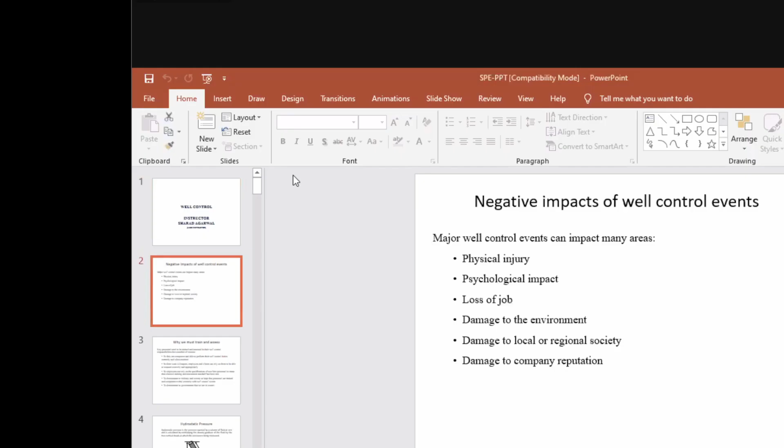Okay, so why well control? I hope you guys can see my screen. Okay, so why is well control important?

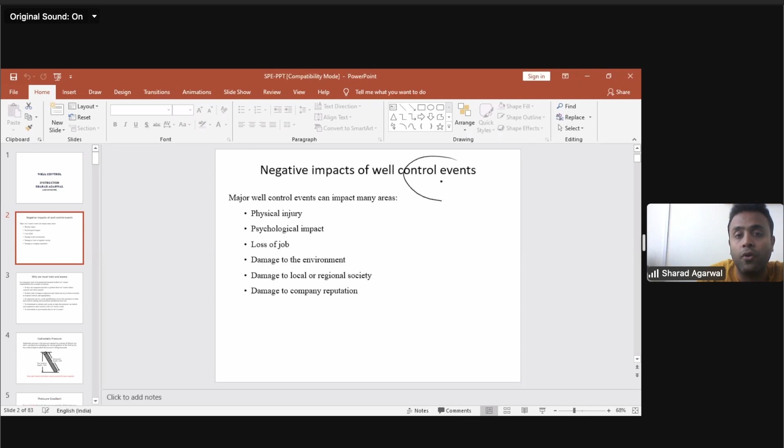Well control is very important. If there is any well control event on rig, what are the negative impacts? When I say well control event, I consider here a blowout or kick.

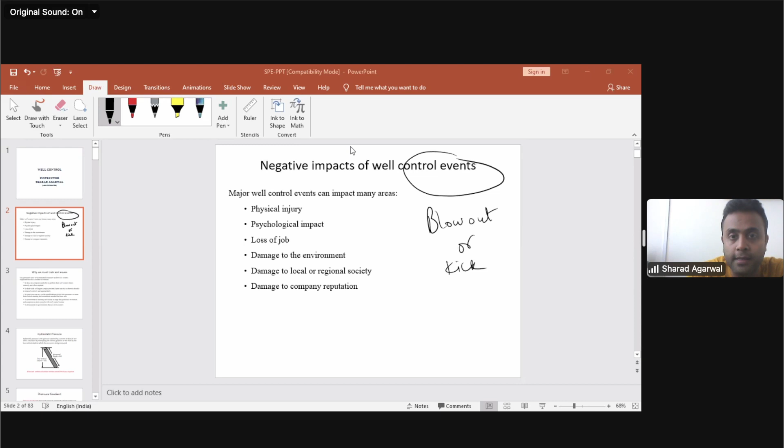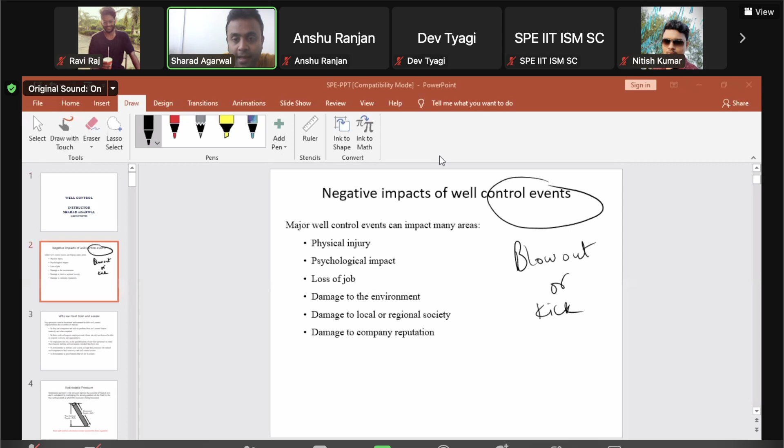So when I say blowout or kick, what do you mean by blowout or kick? What is the difference between blowout and kick, guys? Message me in the chat box. Yes, Supriya, very active candidate in my class. Dev, very good. So what is the difference between blowout and kick?

Kick is controllable. Blowout is uncontrolled. No. Very good, Rishabh Kumar. So is it kick? Rishabh has given me the right answer.

So kick is entry of formation fluid in the wellbore. When formation fluid is in the well, it is called kick. And when this formation fluid comes to the surface, it is called a blowout. You can control kick as well as blowout, there is no problem in that. Kick is an entry of formation fluid in the wellbore, and blowout is at the surface.

Very good, Rishabh. So if there is any well control event, it will impact many areas, like physical injury, psychological impact, loss of job for driller, tool pusher, rig managers, assistant drillers, they can lose their job, and damage to the environment. Which incident was that? Yeah, Gulf of Mexico. You know guys, in Gulf of Mexico, sea animals died. The environment was badly affected.

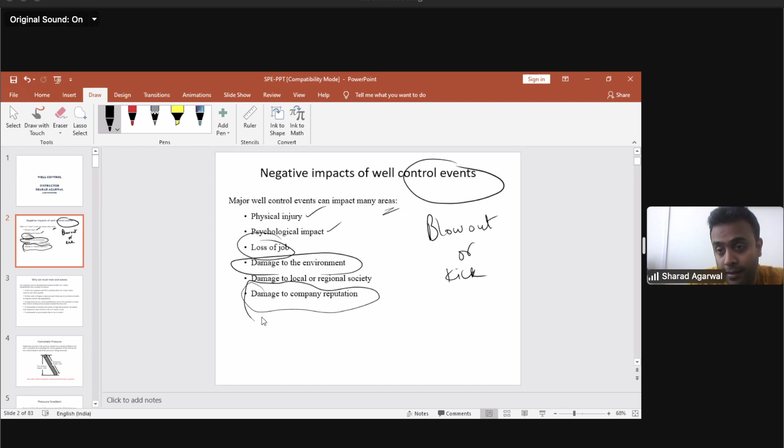So why must we train and assess? Why is well control training important? Key personnel, meaning anybody working on a rig or in the oil and gas industry, must do well control training. Key personnel need to be trained and assessed in their well control responsibility for a number of reasons. Now you guys are doing this course.

Of course it's a short course, but doing this course means you are aware of what to do in case of a kick and what to do in case of a blowout, and apart from that, you also know how to detect a kick. It is very important.

So this well control training is not only for freshers. Everybody working in the oil and gas industry should do this course every 2 years so they can review their well control knowledge. In well control training, we teach so that people are competent and able to perform their well control duties correctly and when required.

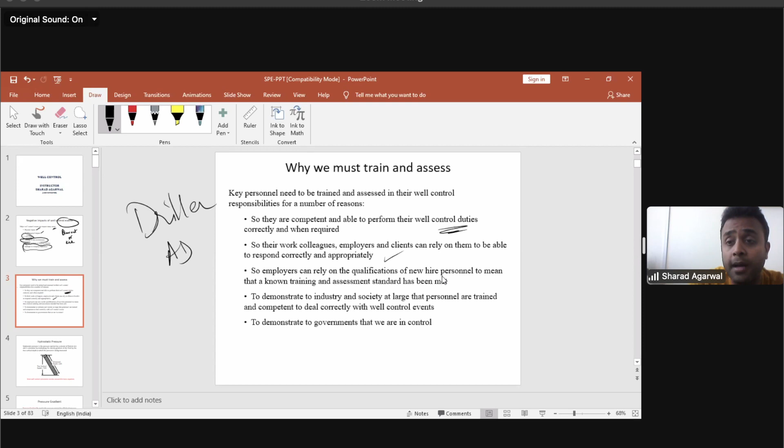Okay, so it is very important that driller, assistant driller, tool pusher, rig managers, they know how to detect a kick, what are the kick indicators, what are the kick warning signs. So their work colleagues, employers, and clients can rely on them to respond correctly and appropriately. Anybody who has this well control certificate, whether from IADC or IWCF, it proves that you have knowledge of well control and your colleagues, employers, clients rely on you. Mr. Dev, Mr. Anshu, Mr. Ravi, Mr. Rishabh, they have done this basic training, they have the basic knowledge of well control, and we can rely on them because they hold valid IADC or IWCF certificate.

So employers can rely on the qualification of new hire personnel to mean that a known training and assessment standard has been met. IADC and IWCF are two international organizational bodies. They approve some institutes where you can go and do this well control training. It's usually for 5 days. You complete this well control training, complete exams as per IADC and IWCF standards, and if you pass, you get your certificate.

This is to demonstrate to industry and society at large that personnel are trained and competent, and to government that we are in control. Indian government or Middle East government authorities have some restrictions on drilling companies, that if you are drilling in this location, all your employees should have IADC or IWCF certificate.

Okay, let us start with well control. So what is hydrostatic pressure? I told you we use mud to control. What are the functions of mud? Yes, to exert some hydrostatic pressure, to lift cuttings, mud cake, lubricant. There are different functions of mud, but in well control, mud is exerting some pressure at the bottom of the well. So this pressure, when the mud is static, is called hydrostatic pressure.

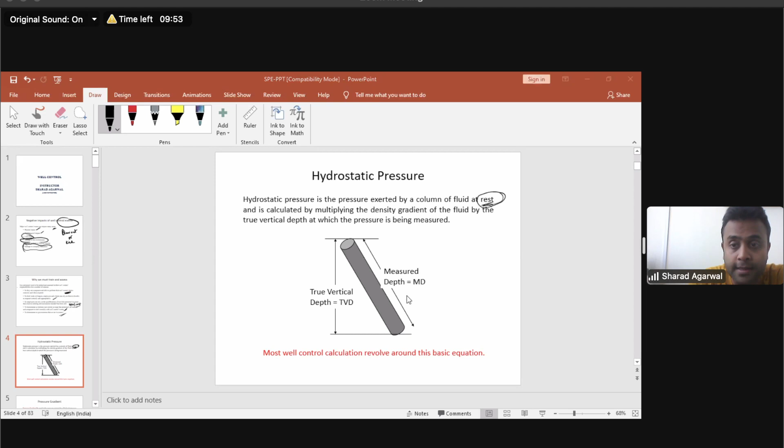And this pressure is calculated using the formula: hydrostatic pressure equals mud weight into constant 0.052 into true vertical depth. Hydrostatic pressure is the pressure exerted by a column of fluid at rest and is calculated by multiplying the density gradient of fluid by the true vertical depth at which the pressure is being measured. So this is the formula: hydrostatic pressure is mud weight into 0.052, which is constant, and TVD is true vertical depth, in feet.

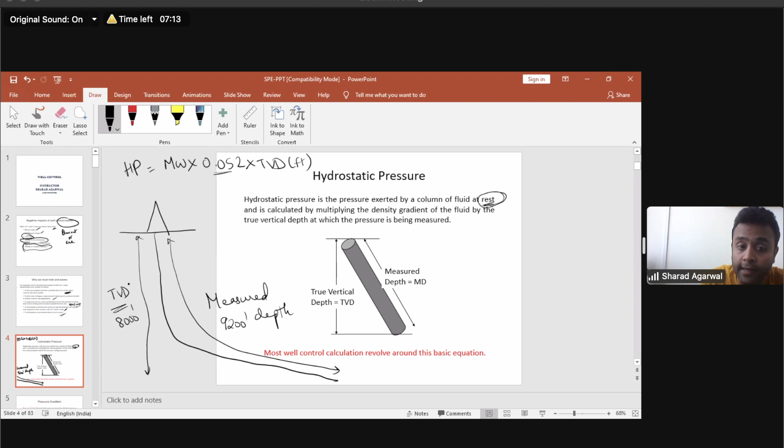So please keep it in mind that while calculating pressure, whether it is hydrostatic pressure, bottom hole pressure, any pressure, you have to consider TVD. In exams, sometimes they confuse you, asking you to calculate hydrostatic pressure and then giving you both TVD and MD. So don't get confused. If they're asking you to calculate pressure, consider TVD. And if they are asking you to calculate strokes required for circulation, time required for circulation, or well volume, then you have to consider measured depth - the total length of the well.

Okay, so MW is mud weight. Mud weight is in PPG. What is PPG? Yes, message me in chat box. What is PPG? Where is my Rishabh? Rishabh Kumar, what is PPG? Come on... Pounds - whoa, whoa, whoa, very nice, very nice. Okay, yes correct, PPG is pounds per gallon. Very good. Okay, come on, now do this calculation.

If mud weight, let me see. Let me stop this.

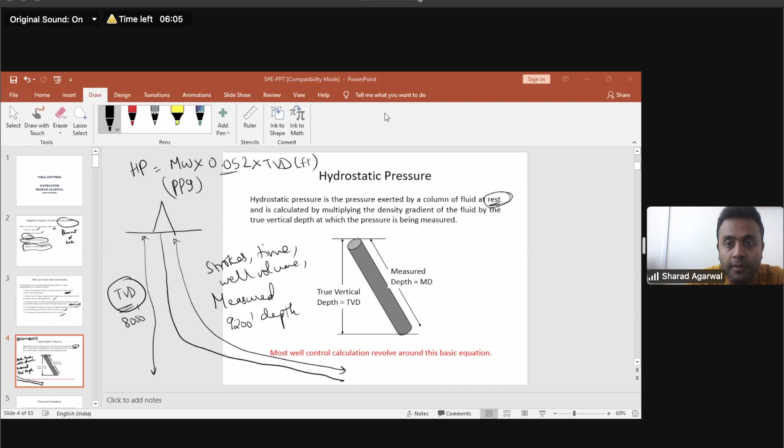Okay, so we have seen the formula for hydrostatic pressure is mud weight into 0.052 into TVD. Now suppose mud weight is 10 ppg and TVD is 10,000 feet.

So what is hydrostatic pressure? Message me in the chat box. Yes, very good, it's 5,200 psi. Very good, guys.

So units is very, very important. Please use units everywhere. If you are working on rig, units is very, very important, guys.

So now keeping constant mud weight as 10 ppg, if I change my TVD to 1,000 feet, then what is my hydrostatic pressure? Guys, TVD is 1,000 feet, it is not 1 lakh feet.

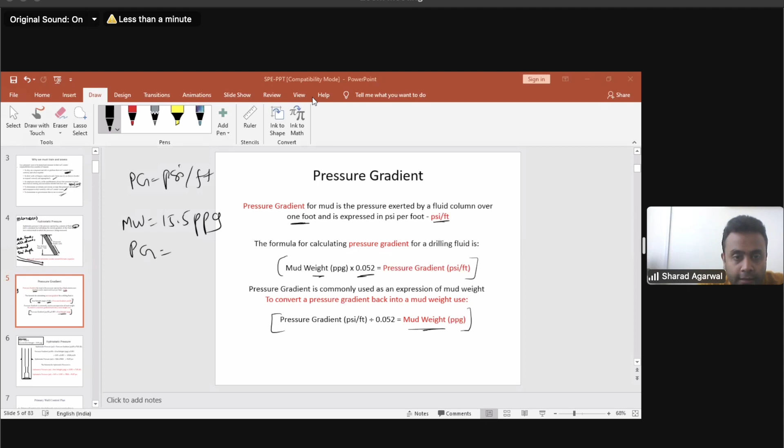Calculate pressure gradient. Yes Nitesh, very good. It is 0.806 psi per feet. Very good, guys, I'm really happy that you guys are learning.

So this means that 15.5 ppg mud exerts 0.806 psi pressure per feet. Now, if my pressure gradient, come on, listen to me, if my pressure gradient...

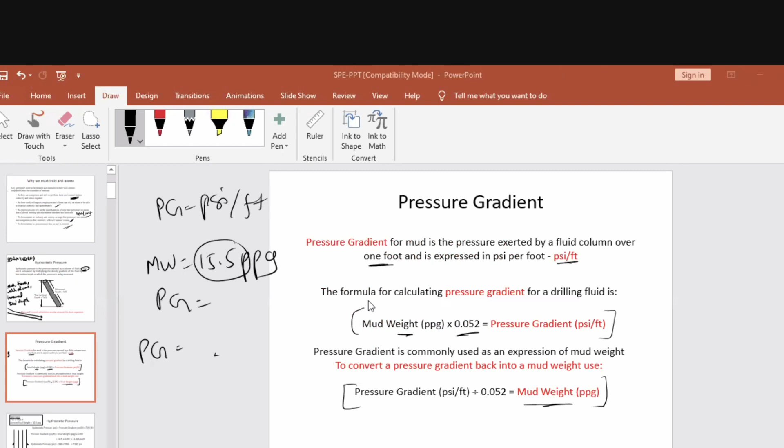Okay guys, so we were learning about pressure gradient. Come on, so if pressure gradient is 0.44 psi per feet, then calculate mud weight. Come on, tell me your answer, guys. If pressure gradient is 0.44 psi per feet,

yes, so what is your mud weight? We have already discussed. Yes, very good Anshu, so it is 8.46 ppg. Excellent, excellent work, guys, very good. I'm so happy you guys are learning.

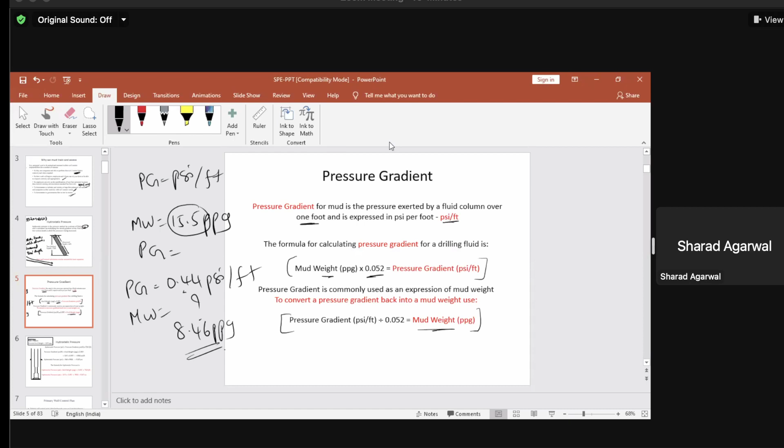Okay, so understood? So now we will... Yeah.

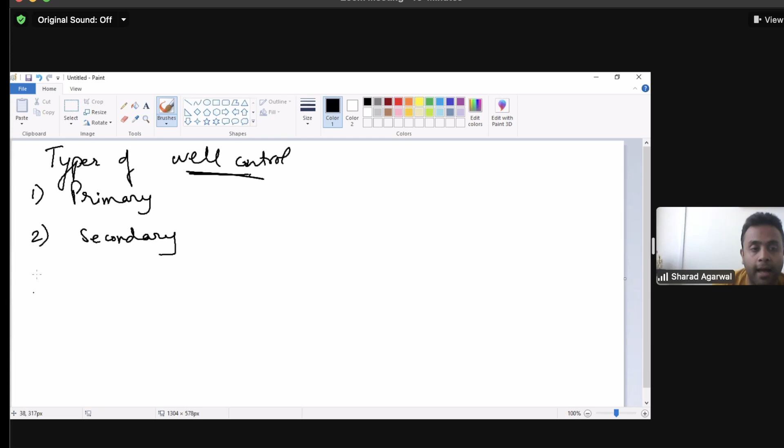Okay, so now we will learn types of well control. Types of well control means what are the different types of well control? How do you control a well? So number one is primary well control, two is secondary well control, and three is tertiary well control. Okay, so it's primary, secondary, and tertiary.

So what is primary well control? Can anyone tell me? How do you control your formation fluid from entering the wellbore? Primary well control, how? By mud, yes, very good Nitesh.

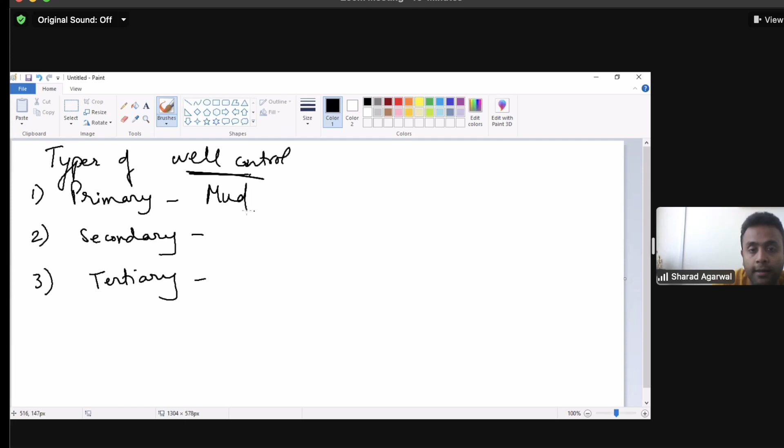By maintaining hydrostatic pressure. So mud, you're using mud to exert hydrostatic pressure at the bottom. So mud is your primary well control.

Now, if your primary well control fails, then what is secondary well control? Very good, Nitesh. If your primary well control fails, formation fluid enters the wellbore. How will you control your well then? Formation fluid.

Yes, very good, Nitesh, Sandeep, Divesh. So you are using your BOP. Okay, BOP is your secondary well control.

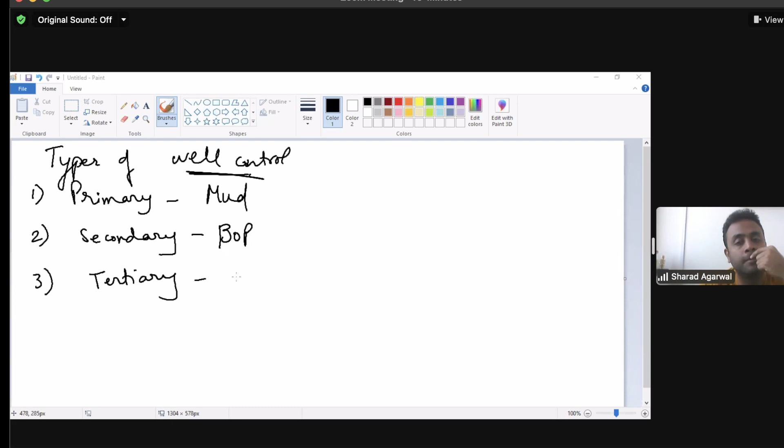Shear rams. Tertiary well control is use of shear rams. You see, these are shear rams. Now what they do - if your annular BOP fails to close, then you use shear rams. Shear rams will cut the pipe and close the well.

Okay, so this is what happened in Gulf of Mexico. Primary barrier failed, mud failed, formation fluid entered the wellbore. Secondary barrier, annular BOP, failed. Tertiary rams, shear rams, also failed, and there was a blowout. So let us watch that video, guys.

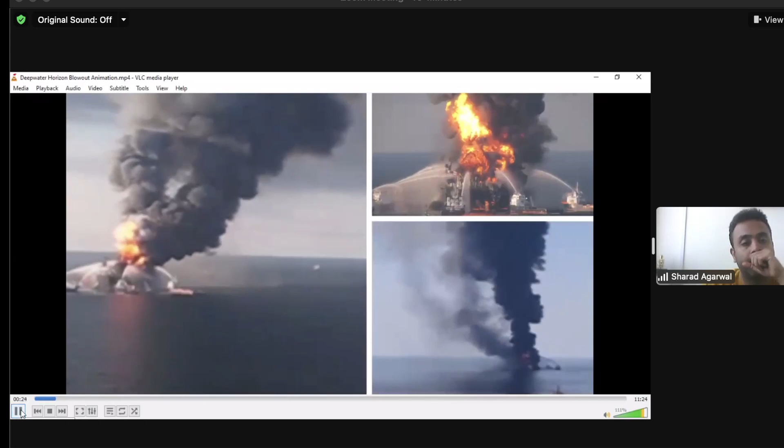April 20th, 2010. 11 workers died and 17 were seriously injured by an explosion on the Deepwater Horizon, an offshore drilling rig located approximately 50 miles off the coast of Louisiana. The rig burned for 2 days, eventually sinking and triggering the largest oil spill in U.S. history.

Okay, guys, 11 people died and many more were injured. And see the sea animals, see the condition of the sea animals, see the condition of the sea. Okay, very, very, very disappointing, guys.

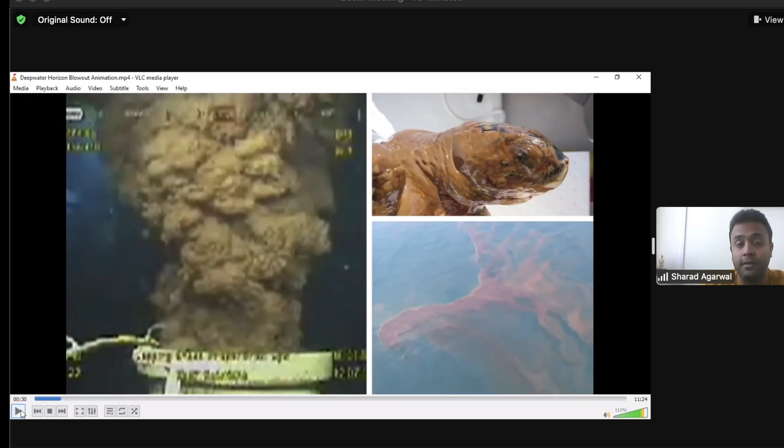Oil and gas spewed up from the sea floor. The Deepwater Horizon had been drilling oil wells.

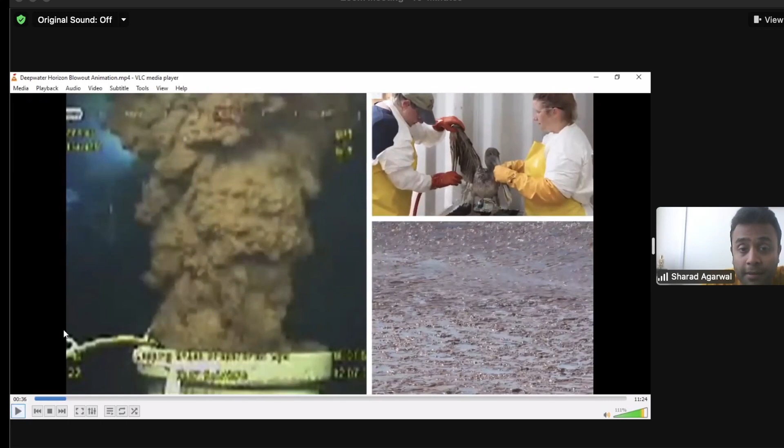See, guys, birds, animals, sea animals, in 5,000 feet of water. See the conditions, see the water, all oil everywhere, mud, oil-based mud everywhere.

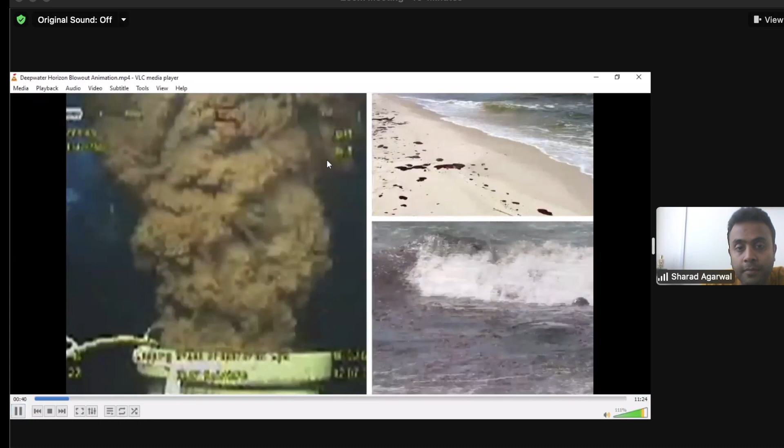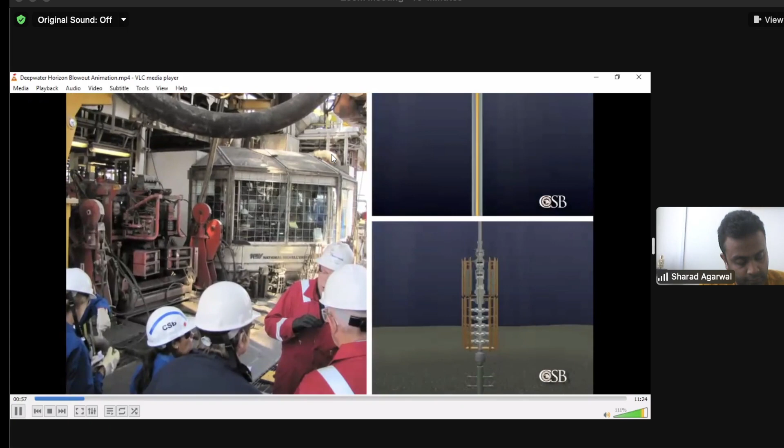In an area of the Gulf of Mexico known as the Macondo Prospect. In 2010, the CSB launched an investigation to examine the technical, organizational, and regulatory factors that contributed to the accident. During the investigation, the CSB made new findings about why a key piece of safety equipment, the Deepwater Horizon's blowout preventer, failed to seal the well during the emergency. These new findings help explain why the accident was so devastating. And the CSB cautioned that other blowout preventers currently in use could fail in similar ways.

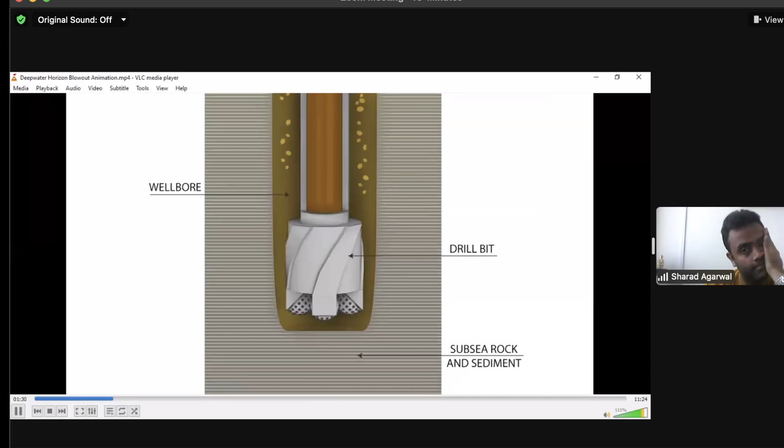Drilling an offshore well involves creating a pathway between the drilling rig and oil and gas reservoirs trapped beneath the sea floor. A deep hole, or wellbore, is drilled through layers of subsea rock.

So guys, you have to keep in mind that formation fluid will enter only the annulus. Formation fluid will never enter the drill string because we have a float valve, that is a non-return valve, a one-way valve near the bit. If we don't have a non-return valve near the bit, then there is a possibility that formation fluid will enter the drill pipe, the drill string. But most of the time formation fluid will enter only the annulus.

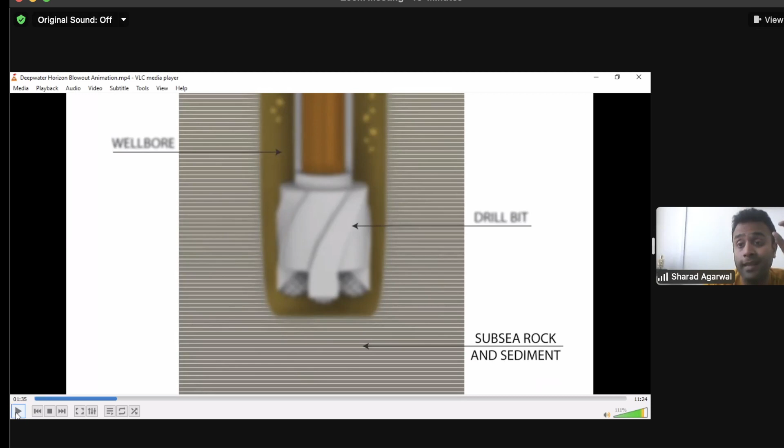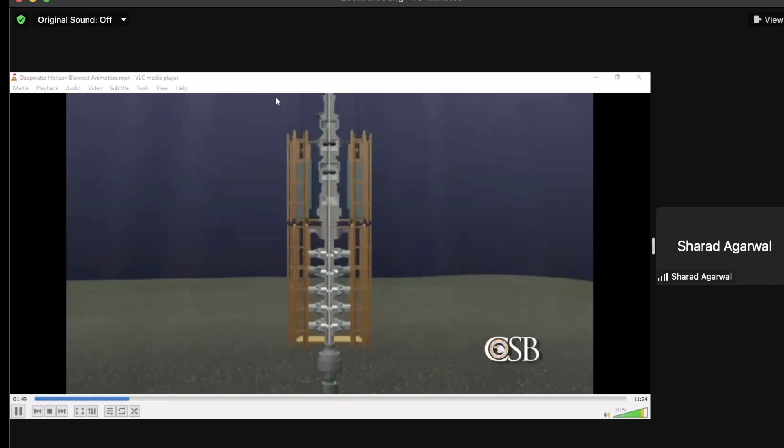Sediment. These rocky layers can contain trapped water, crude oil, and natural gas under pressure. An unplanned flow of these well fluids into the wellbore, known in the industry as a kick, can be dangerous. Without careful management, a kick can lead to a blowout, the uncontrolled release of flammable oil and gas from the well.

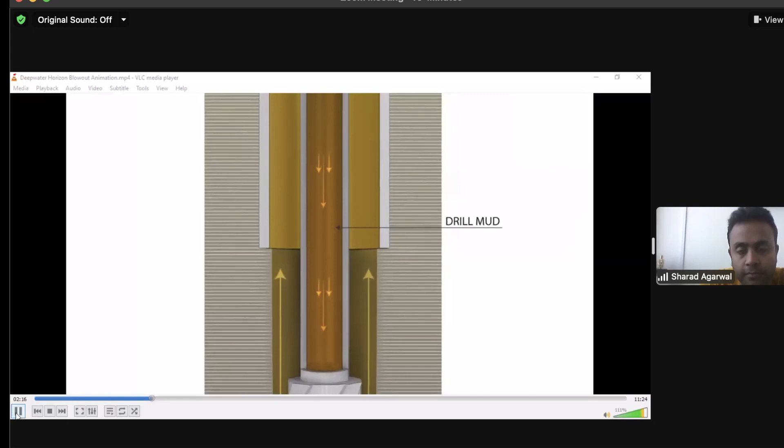A blowout can be catastrophic, since oil and gas reaching the drilling rig can quickly find an ignition source, leading to a fire or explosion, endangering the lives of the drilling crew. To prevent kicks, drillers pump a dense slurry called drilling mud into the well, creating a barrier between the undersea oil and gas and the piping that leads to the rig.

If the mud barrier fails or is somehow removed, the safety of the drilling crew depends on a critical piece of equipment located on the sea floor called the blowout preventer, or BOP. The BOP is a complex electrically and hydraulically powered device that is essential for controlling the well.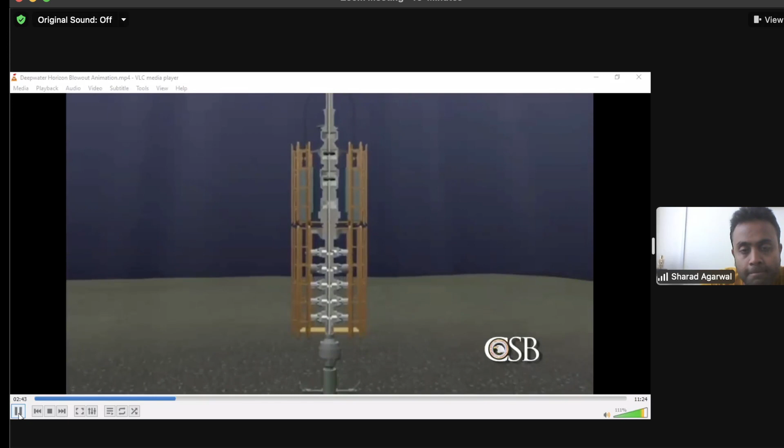So guys, these are rams. This is our drill string, drill pipe. As I said, we have different types of rams: one is annular BOP, pipe ram, blind ram, and shear ram.

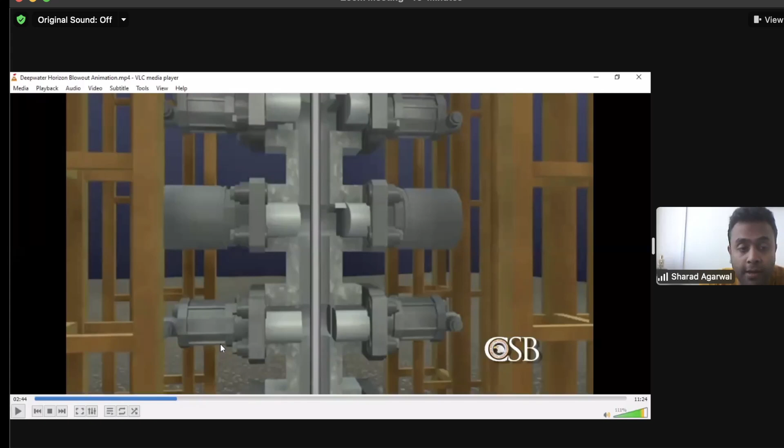In an emergency situation, the BOP prevents a disaster on the platform high above on the sea surface. The BOP is connected to the rig by a large diameter pipe called a riser. If a kick occurs, the blowout preventer is designed to prevent flammable oil and gas from traveling up the riser to the drilling rig. This is done by sealing the area around the drill pipe, known as the annular space.

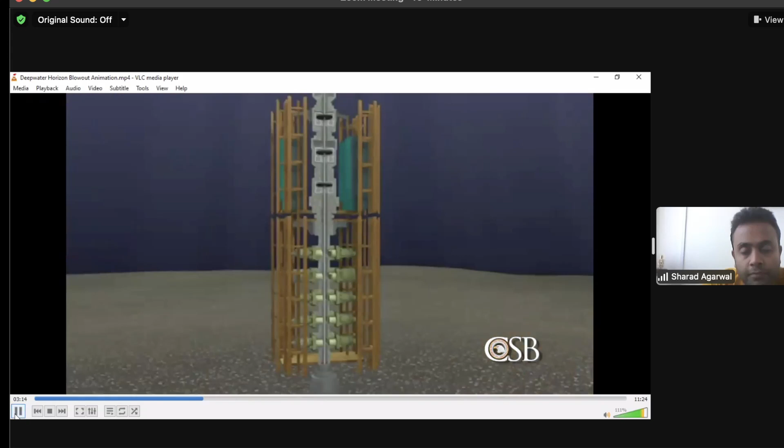To do this, the crew can manually close pipe rams, donut shaped. So guys, this is how we close rams. It will close around the pipe and stop the flow of fluid to surface through the annulus. These are rubber devices known as annular preventers.

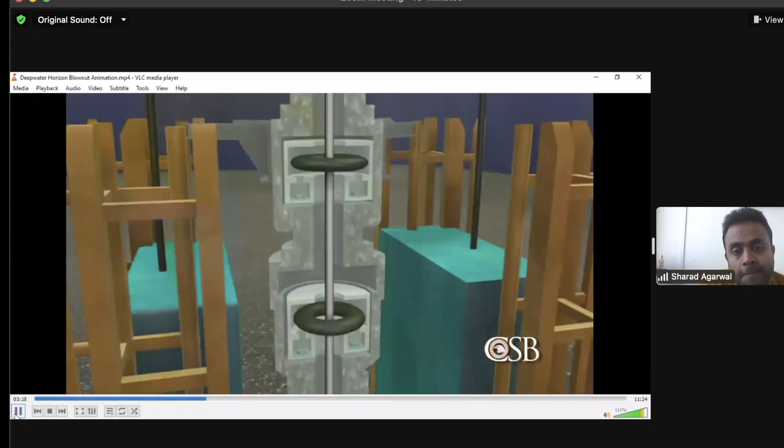If those devices fail to work, the last resort is a pair of sharp metal blades which form a blind shear ram. So this is shear ram, guys. The shear ram will cut the pipe and seal the hole, cutting the drill pipe and sealing the well.

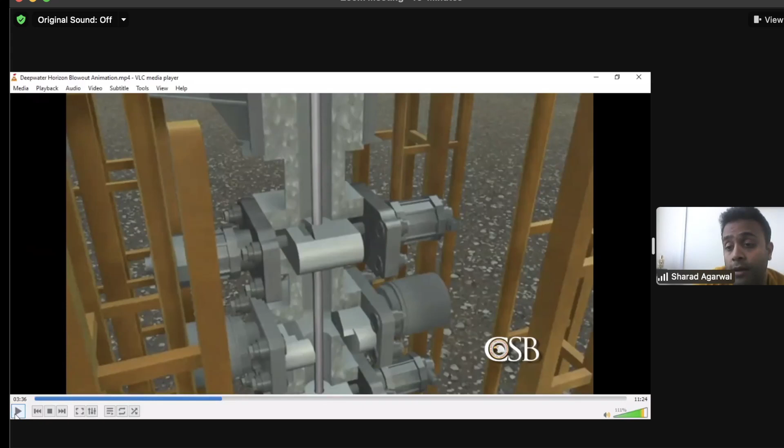The blind shear ram can be activated manually or by automated emergency systems. So this is the tertiary well control, the last part of well control, used only in case of emergency, where we cut the pipe and seal the hole.

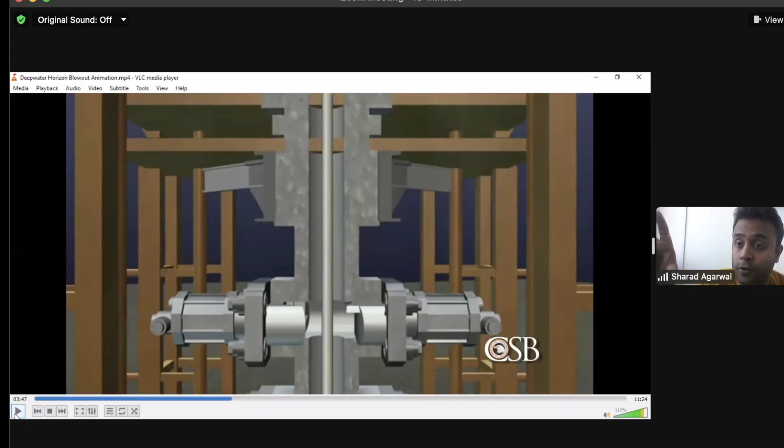The driller detected the kick, but it was too late. He tried to close the annular BOP, but it failed. Then he tried to close the shear ram, but even the shear ram failed. Now why? Let us see.

The kick went undetected, eventually passing above the blowout preventer and traveling quickly up the riser toward the Deepwater Horizon and the 126 people on board.

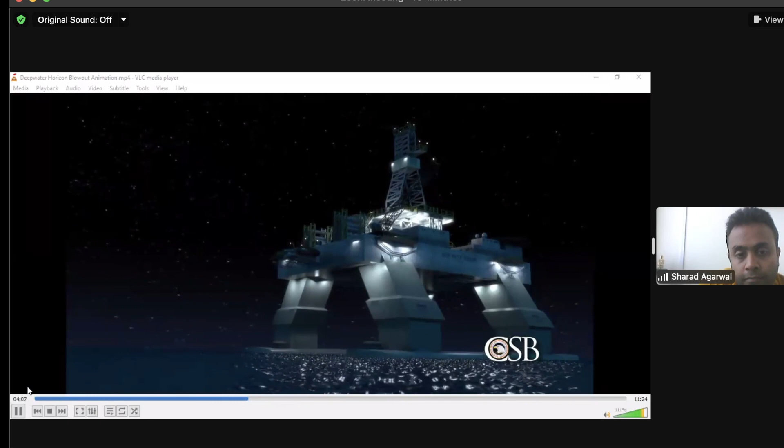Just after 9:40 p.m., drilling mud, forced upwards by the rising oil and gas, suddenly blew out onto the rig. Crew members responded by closing the upper annular preventer in the BOP. However, this did not seal the well as intended, and flammable oil and gas continued to flow.

The annular BOP failed to control the flow of formation fluid to the surface, and it continued up the riser toward the rig.

Next, the crew closed a pipe ram. This successfully closed the annular space and sealed the well. But tragically, this proved to be only a temporary fix, as oil and gas that were already above the pipe ram continued to flow inexorably toward the Deepwater Horizon.

As the oil and gas escaped the riser onto the rig, the pressure dropped in the annular space above the pipe ram. But at the same time, the pressure in the drill pipe climbed substantially. The drill pipe was closed at the top, but oil and gas continued to flow in from the reservoir below.

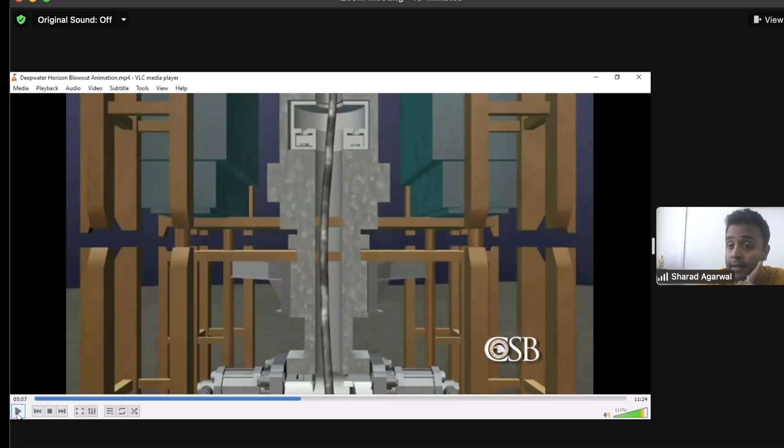After extensive analysis, the CSB concluded that this large pressure difference likely caused the drill pipe to buckle. This is the important reason, guys: because of the large differential pressure in the pipe and in the annulus, this pipe buckled, and when the driller closed the shear ram, it was not possible to shear, because of the buckling of the drill pipe.

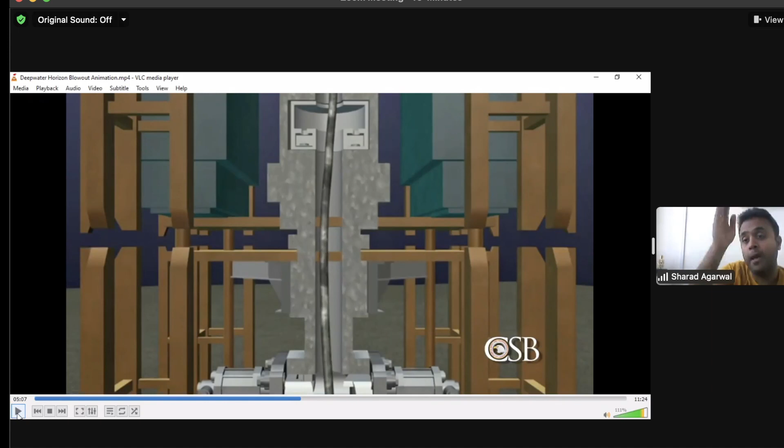It was not able to shear the pipe and close the well. Let us see in this video — it was actually bending the pipe off center inside the blowout preventer. The buckling pushed sections of the drill pipe outside of the reach of the blind shear ram blades. This would eventually prove to be catastrophic.

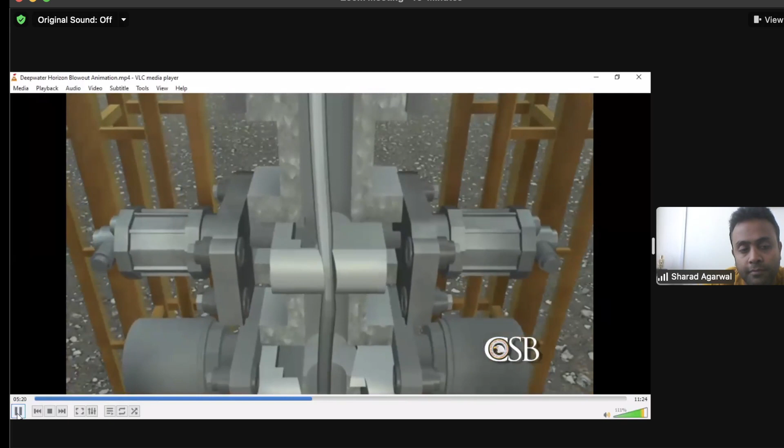At approximately 9:49 p.m., the flammable hydrocarbons found an ignition source. The first explosions shook the Deepwater Horizon.

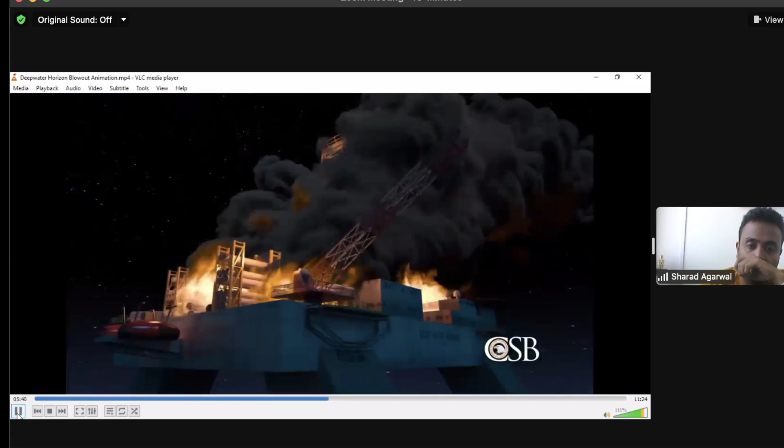With the drill pipe buckled, the explosion and subsequent loss of electrical and hydraulic power from the rig likely activated an automated system on the blowout preventer known as the AMF deadman, which closes the blind shear ram. So guys, you understood this, the reason behind

Gulf of Mexico incident. Okay, so guys, this is very important. Well control is very important, you should detect kick at the right time, and you should always properly maintain your equipment. It is always recommended that this pressure testing equipment should be pressure tested and function tested every 14 days, as per API recommendation. Sometimes there is time pressure from the operator company side, so usually they do it in 30 days.

So let us continue. Any questions, anyone?

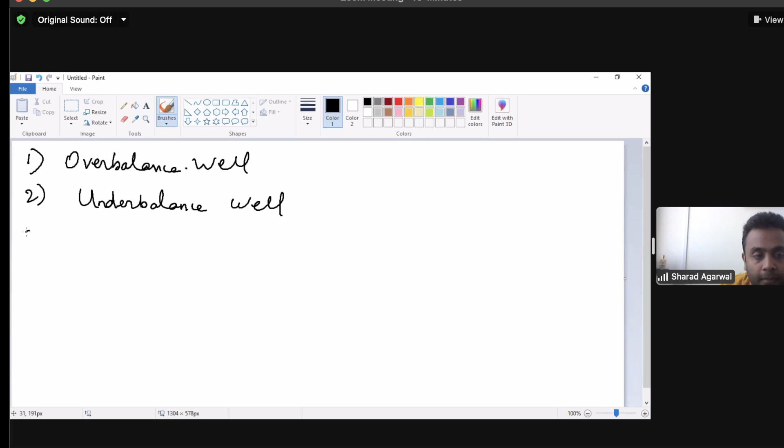So now we'll see different types of balances. Number one, overbalanced well. Number two, underbalanced well. Number three, balanced well.

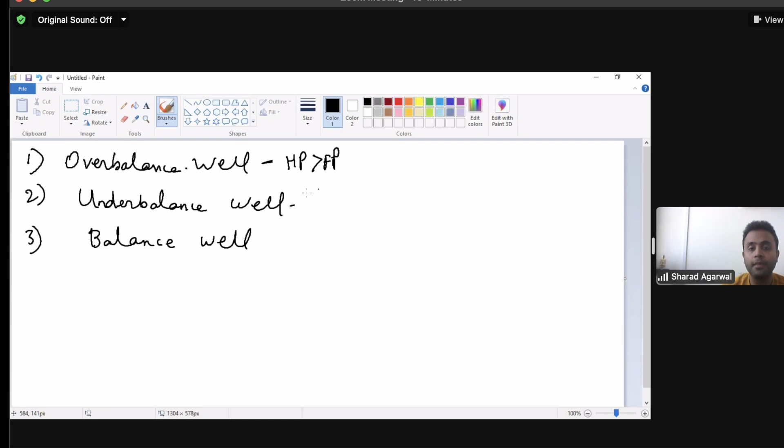So what is overbalanced well? Overbalanced well is when your hydrostatic pressure is greater than formation pressure. So when hydrostatic pressure is greater than formation pressure, the well is said to be overbalanced. Underbalance is when hydrostatic pressure is less than formation pressure, then the well is said to be underbalanced. And balanced is when hydrostatic pressure is equal to formation pressure, then the well is said to be balanced.

It is always recommended that you keep your well overbalanced, that is hydrostatic pressure slightly greater than formation pressure, so that you can drill properly.

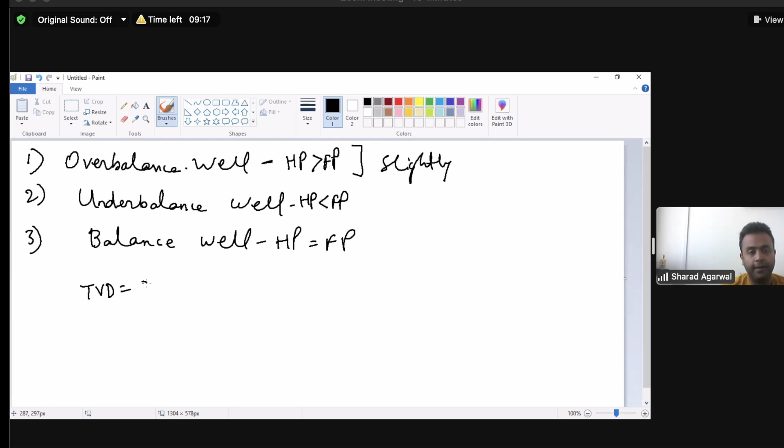Okay, let us do one numerical. Now suppose your TVD is 9,500 feet, mud weight is 9.5 ppg, and formation pressure gradient is 0.52 psi per feet. Tell me whether the well is overbalanced, underbalanced, or balanced. Calculate hydrostatic pressure, calculate formation pressure, and check. They've given you TVD, mud weight, and formation pressure gradient. Tell me whether the well is overbalanced, underbalanced, or balanced.

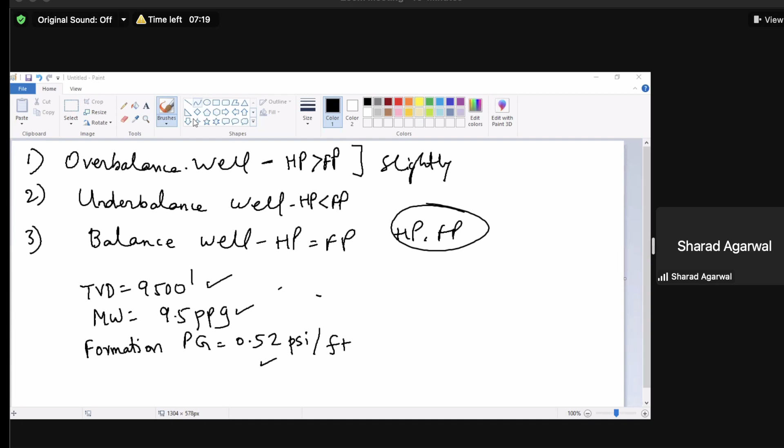Yes, very good, so the well is underbalanced. How will you do it? First, you calculate your hydrostatic pressure: mud weight 9.5 into 0.052 into 9,500, so it is 4693 psi, that is your hydrostatic pressure. Formation pressure is 0.52 into 9,500, which is 4940 psi. So your formation pressure is more than hydrostatic pressure, so the well is underbalanced. Okay, very good.

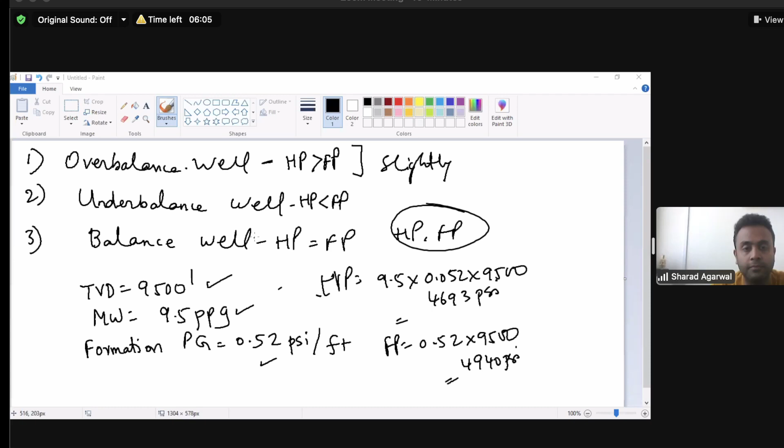So now we'll learn about types of pressures. Number one is abnormal formation pressure. We have normal formation pressure, and we have subnormal formation pressure. Abnormal formation pressure is if the formation pressure gradient is more than 0.465 psi per feet, it is said to be abnormal formation pressure zone.

Most of the kick will occur in abnormal formation pressure zone. Normal formation pressure is if the pressure gradient is more than 0.433 psi per feet, but less than 0.465 psi per feet, then it is said to be normal formation pressure zone.

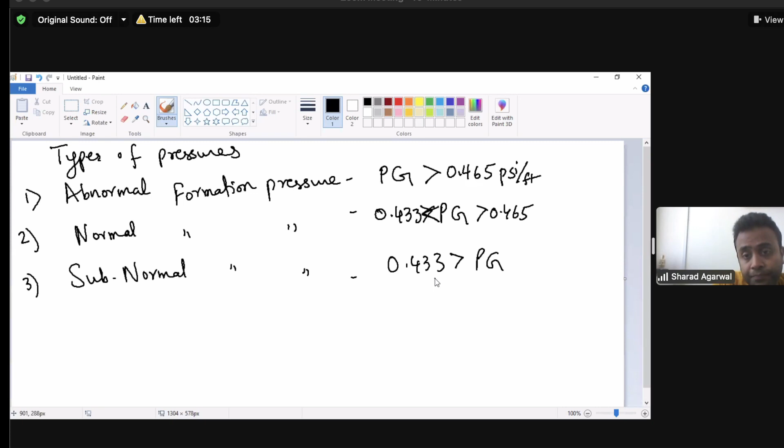So what is 0.465 psi per feet? It is the pressure gradient of seawater. So if formation pressure gradient is more than 0.465 psi per feet, it is abnormal formation pressure zone. If the pressure gradient is between 0.433 and 0.465, it is normal pressure zone. Subnormal pressure zone is if it is less than 0.433.

So what happens in subnormal? Mostly loss circulation will occur in subnormal pressure zone.

Any questions, anyone? I think it will finish in 2 minutes, huh? Yes, sir, so you wanted me to conduct for 1.5 hours, no? You want me to continue or stop? So you can continue with your presentation. Okay, we'll continue for 15 minutes more then. I don't know what plans you guys have.

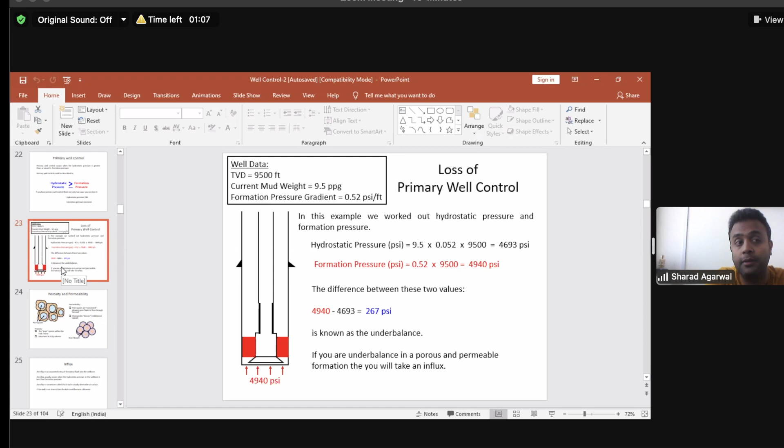Okay, so we have discussed very important topics. We have discussed hydrostatic pressure, formation pressure, pressure gradient, and we have also seen the Gulf of Mexico incident, why the team failed to close the BOP, why the BOP failed. Because of buckling of drill pipe, it got off-centered and we were not able to close the well. And now we have seen types of balances - overbalanced, underbalanced, balanced - and types of pressures.

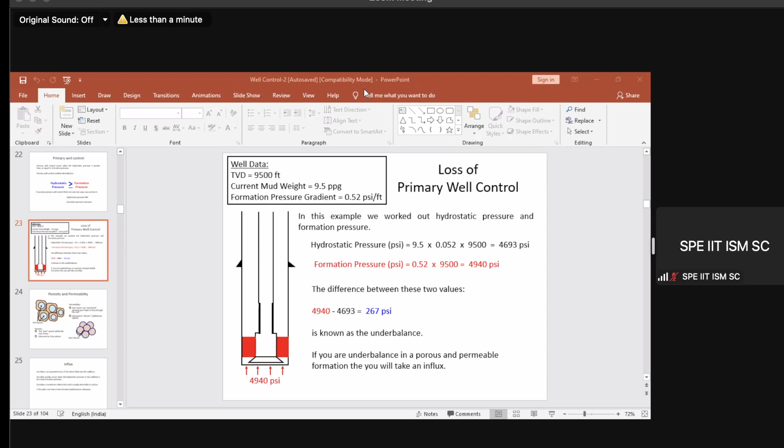Okay guys, 1 minute, huh? So there is a question in the chat box. Okay, so this we have seen. So we will discuss about influx. Influx is entry of formation fluid in the wellbore.

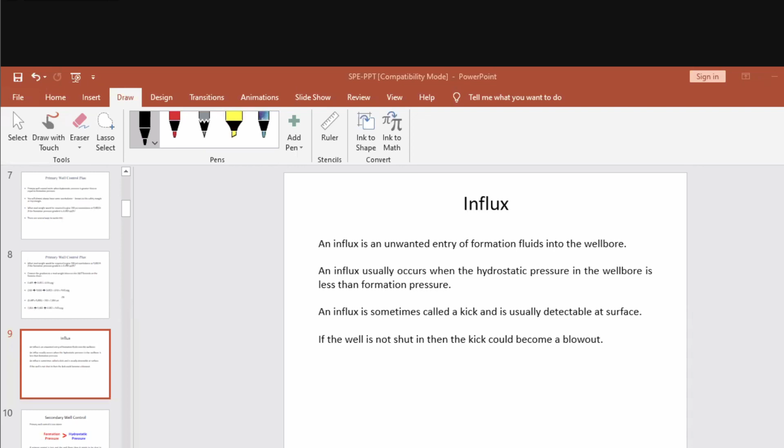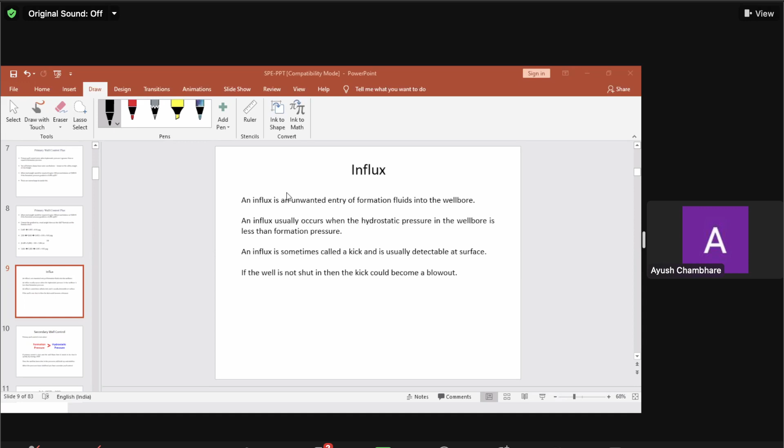So let us discuss about influx. What is influx? Influx is nothing but entry of formation fluid in the wellbore. When hydrostatic pressure goes below formation pressure, there is a kick and formation fluid enters the wellbore. So when the formation fluid enters the wellbore, we go for secondary well control, that is, we use BOP.

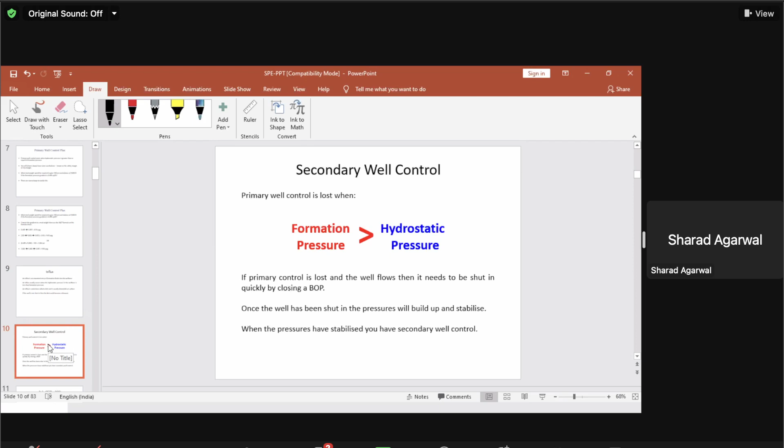We try to close annular BOP first, because annular BOP can be closed on any size of tubular. So BOP is your secondary well control, and primary well control is your mud. So now we'll see causes of kick.

We'll see causes of kick. Kick is nothing but influx. So what is influx? Influx is entry of formation fluid into wellbore. So primary well control is described as hydrostatic pressure is greater than or equal to formation pressure.

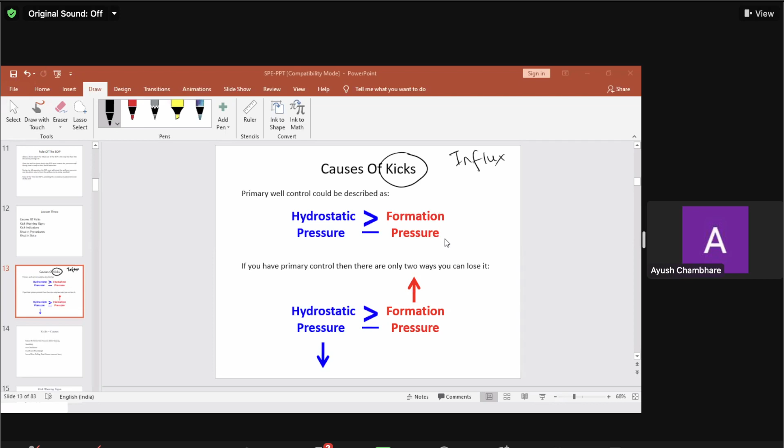So if you have primary well control, then there are only two ways you can lose it - let me mute Ayush. So if you have primary well control, there are only two ways you can lose it: your hydrostatic pressure can drop, or your formation pressure has suddenly increased. These are the only two ways where you can lose your primary well control.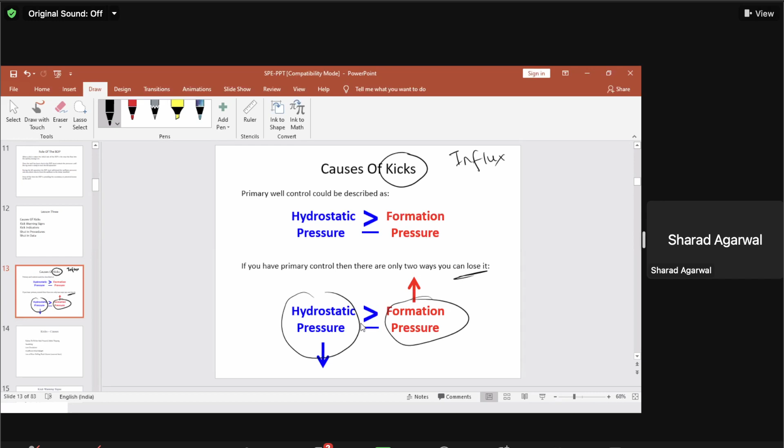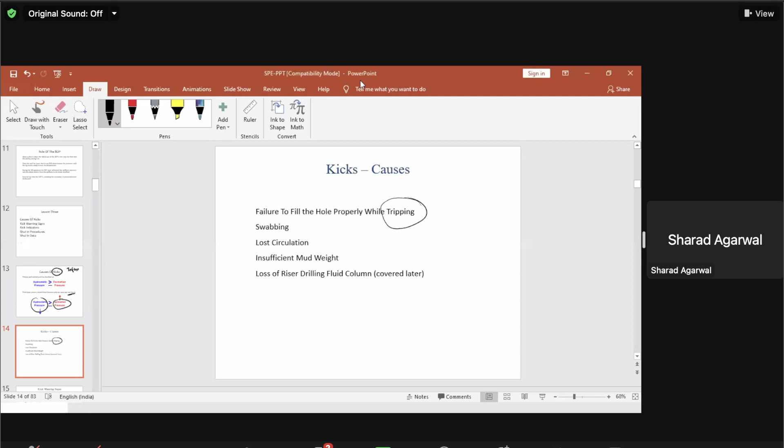Now there are a number of reasons why your hydrostatic pressure will drop, and only one or two reasons where your formation pressure will suddenly increase, that is, you detect an abnormal pressure zone or there is a trapped pressure zone. So what are the reasons your hydrostatic pressure will decrease? Number one, failure to fill hole properly while tripping. Now, what is tripping operation? Tripping is when you're removing pipe out of the hole or going in the hole.

Okay, if a man jumps in the pool, the level of water will increase, and if that man goes out of the pool, the level of water will decrease.

Similarly, if you remove the pipe out of the hole, the level of mud will decrease. And if the mud height decreases, we know that pressure is directly proportional to the height of mud, so hydrostatic pressure will decrease. If hydrostatic pressure goes below formation pressure, there will be a kick.

So this is one reason. What should the driller do? As soon as they are removing pipe out of the hole, the driller should try to maintain the level, the height of mud inside the well.

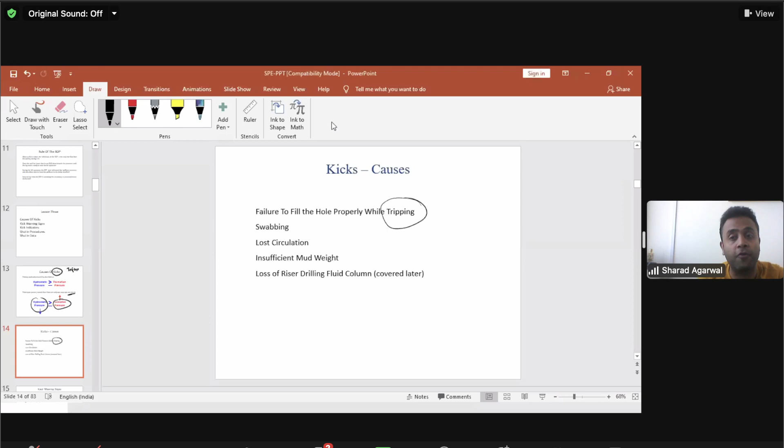Lost circulation is when you're losing mud in the formation. As I told you, if you encounter a subnormal pressure zone, there is a possibility that you can lose mud in the formation. And if you're losing mud in the formation, the level of mud in the well is decreasing, and if it goes below formation pressure, then formation fluid can enter the wellbore.

Insufficient mud weight: suppose you do not maintain proper mud weight, you add more water, or you are not mixing your mud properly with agitators. If the agitators are not operating, the barite in the pit will settle down and your mud weight will decrease. So these are a few reasons where your hydrostatic pressure can decrease.

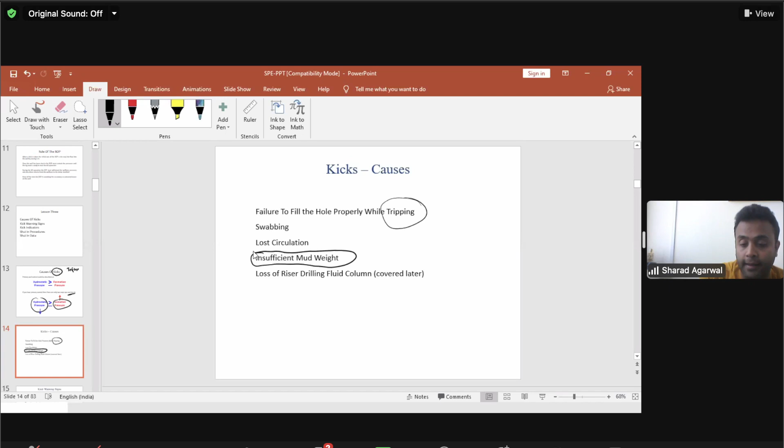Now your hydrostatic pressure is going below formation pressure, or getting equal to formation pressure. I have already told you that you have to always maintain hydrostatic pressure greater than formation pressure, but because of a few mistakes or human errors, there is a possibility that hydrostatic pressure will get equal to or go below formation pressure.

Now, kick warning signs. What is a kick warning sign? It is a well telling you that the bottom hole pressure and formation pressure are getting closer together. Hydrostatic pressure is always above formation pressure, but due to some reasons there is a possibility that they are getting closer, and you get some indications at the surface, which is called a kick warning sign.

So what are these warning signs? Increase in drilling rate, increase in gas trend, you're getting more gas at the surface, change in cutting size and shape, temperature measurement, increase in torque and drag, decrease in shale density, change in D exponent and chloride trends.

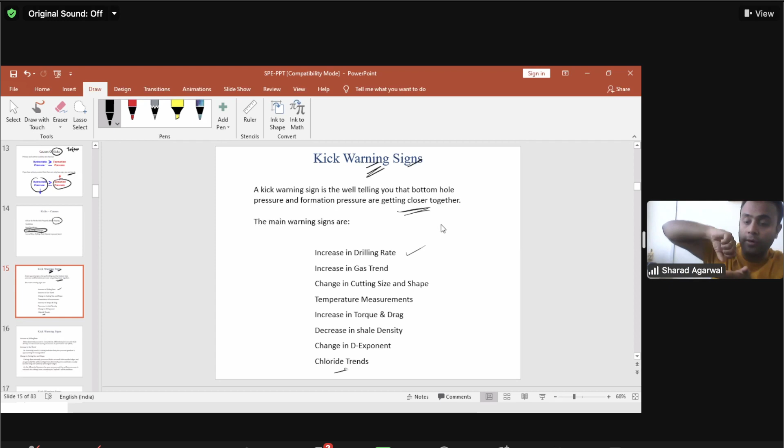Increase in torque and drag: the driller will notice that the torque force or drag force has suddenly increased. So these are a few kick warning signs. Whenever there is a kick warning sign, the driller should stop drilling immediately and consult with the supervisor.

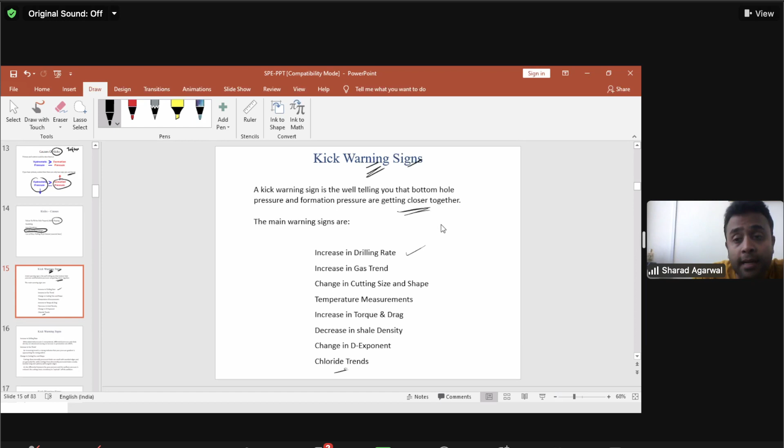These are the kick warning signs. Driller should not close the well for a kick warning sign, but if there are kick indicators, driller should immediately shut in the well using BOP. Driller should first close the annular BOP.

What are the kick indicators? Kick indicators are increase in return flow rate. If driller notices that the mud flowing out of the well through the annulus has suddenly increased in flow rate, it means it is a kick. It's a kick sign.

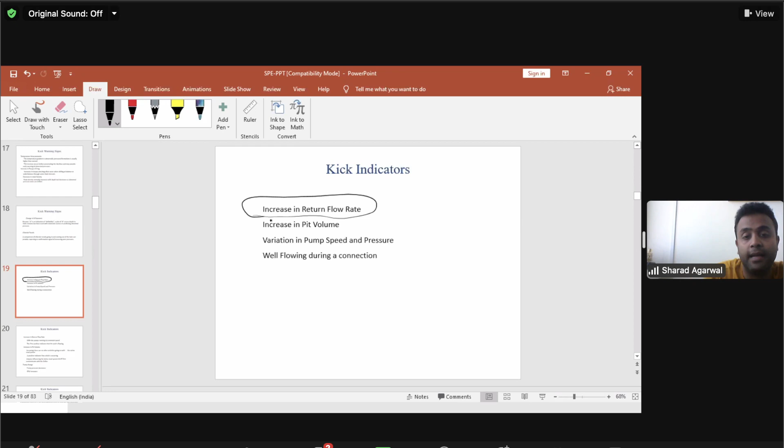Increase in pit volume is another indicator. So if somebody informs the driller that the pit volume has suddenly increased by 10 barrels, it is a kick indicator.

Variation in pump speed and pressure - if the driller notices that pump speed has increased and pump pressure has decreased, it is a kick indicator. And well flow during connection.

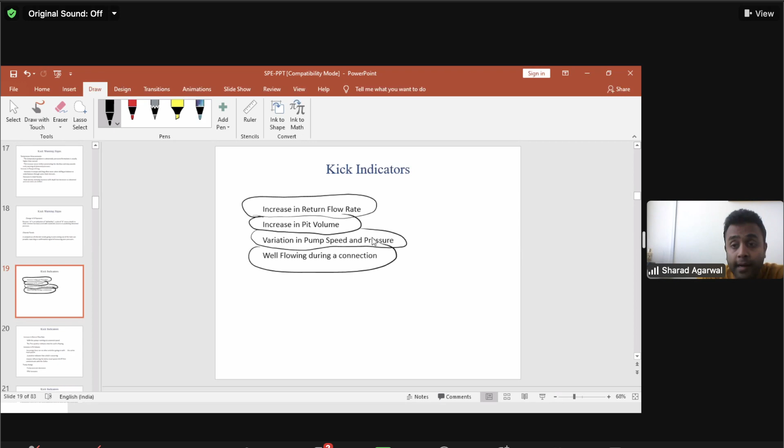If the well is flowing during connection, it means your pumps are off. Pumps are off and the well is flowing. Like if you're not pressing the accelerator in a car and the car is still moving, it means somebody is pushing your car. Similarly here, pumps are off and if you still see the well flowing, it's a kick indicator. So whenever there is a kick indicator, what are the steps the driller should follow?

Driller should immediately stop drilling, stop pumps, stop rotation, and close the annular BOP.

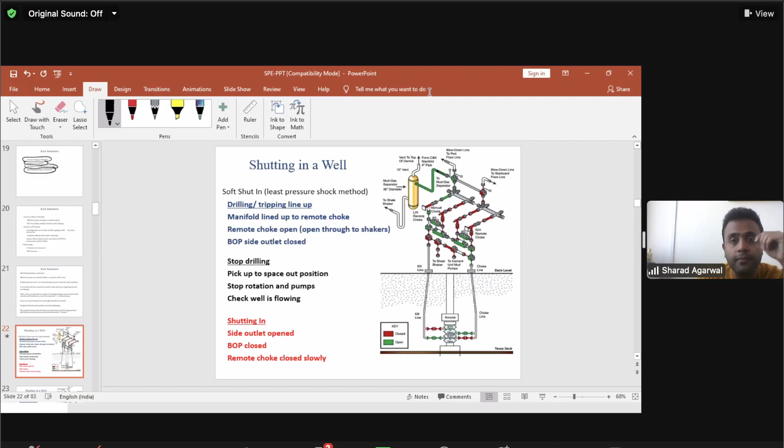So guys, after any of the kick indicators like increase in return flow rate and well flow during connection, driller should shut in the well using different shut-in procedures like soft shut-in procedure, hard shut-in procedure, which we won't be able to discuss today because of time limitation.

There are lots of topics in well control. Usually it is for 5 days. This was the introduction class. So if anyone has any questions...